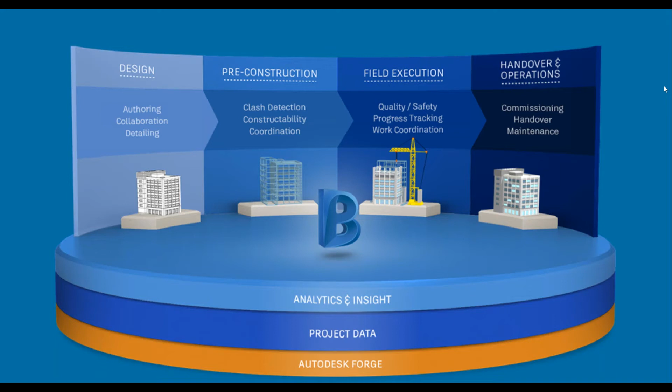So now let's transition over to BIM 360 Docs. Here, this is where everything is going to start and end on our project.

BIM 360 Docs is built on what Autodesk calls a low trust environment. So there's an expectation that we're going to have a number of external stakeholders involved in the project, co-located here within one central area for project information.

What that means is that the entire tool is built on permissions. So we can look at permissions based on individual user, or groups of users based on their company or the role that they play on this project. So when I log in, I'm only getting access to the projects that I've either created or I've been invited to, and I'm only going to see the folder structure that I'm granted access to.

For example, if we are housing our contracts here in this contract folder, and we don't necessarily want anyone outside of our organization to see these, we simply don't grant them access to it, and their folder structure in this case would go from civil to correspondence—they wouldn't even see that that contract folder exists. We can set up this folder hierarchy and all the permissions on a project-by-project basis. We can set up templates. We can really do it however we see fit for our project.

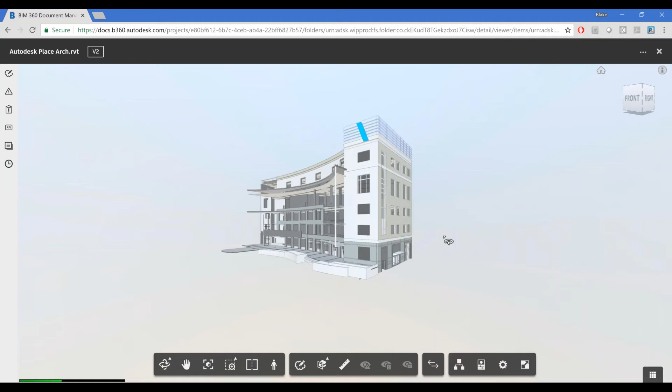Here we can host over 50 file formats that are natively supported for viewing directly within the tool. So if we want to view a Revit model, for example, we can simply select that Revit model and it's going to view it right through our browser without having to have a seat of Revit. This is all rendering live in the cloud. We can now navigate this model, circumvent it, go around it, add sections, and do a number of different views that we'll touch on here shortly.

So we support viewing of those Revit files, DWG, DWF, AutoCAD files, PDFs, all the way out to products like SketchUp files or Microsoft Office files in the form of Word, PowerPoint, Excel. So now a user out on the field has the ability to access that same information that we're seeing in the office environment.

Project files is also the location where our central model is going to reside when we're working inside of a BIM 360 design project. So if we are co-collaborating on a central model, this is where that model will sit, and we'll touch on the folder structure and how we interact with one another in that case.

We also have our plan section then, and you'll notice here that we've got this Autodesk Place Architectural Revit file here, and when we click on it, it was going to take us directly to that 3D model. In the case where we go into our plan section, however, you'll notice that it's the exact same Revit model, and now we are getting all of the various sheet views separated out individually for us. The system does this automatically, so no longer do we have to generate a PDF set every single time the model updates.

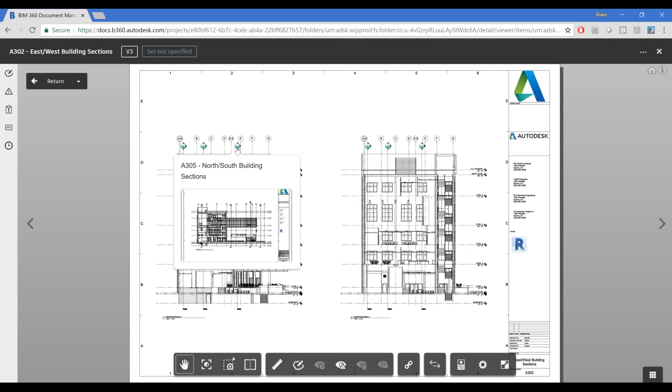I can continue to grab these and navigate further from where I started. I remember when I was in the field, I'd often be trying to understand what was going on in a project, getting the full context, with one sheet between my pinky and ring finger and another between my ring and middle finger, and before you know it I've got this fistful of paper I'm trying to flip back and forth to understand what's going on.

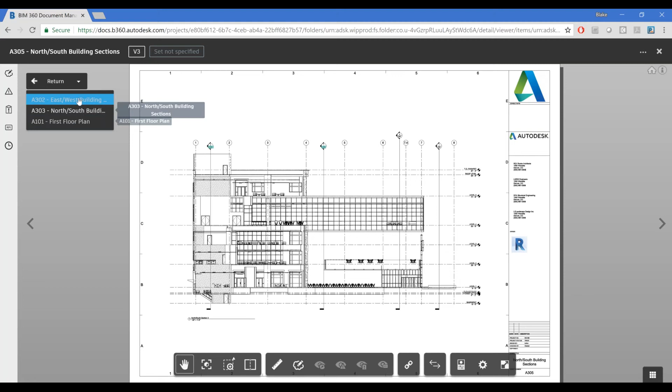Here we have that breadcrumb trail, if you will, where we can easily navigate back to any of those documents we looked at. In this case, I'll select where we started.

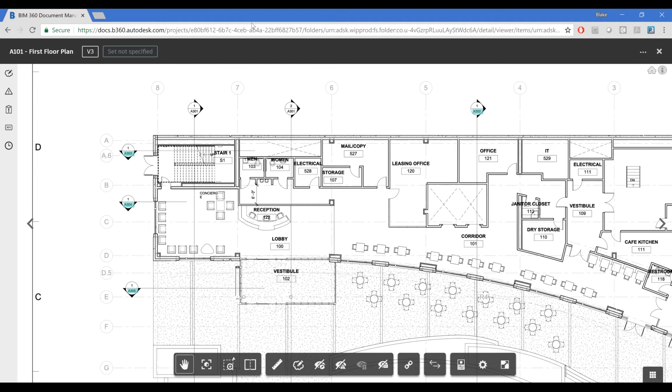The other thing to note is that when we're looking at sheets that don't have section callout hyperlinks, we're not just looking for a shape with some letters and numbers in it, we're actually looking for that content within the project. So if it's not part of our published settings within Revit, we aren't going to create a hyperlink. You'll notice A301 doesn't exist in this folder structure, so it's not going to link to anything. It's also smart enough to know it's not going to link to itself.

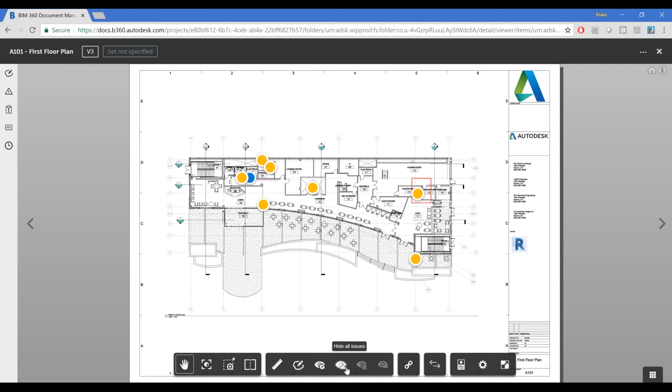The next thing I want to cover is our markups. I'm going to hide our issues here. You'll notice we've got a couple markups on this document, and in our markups pane on the left I can see who created them, when they created them, and what version they created them on. As I select these, it brings that markup front and center in focus for me.

One thing to note is that these markups are created as secondary layers over the top of our documents. What that allows us to do is, as we create new versions, we're not just going to overwrite this markup or get rid of it simply because there's a new version. Maybe that new version doesn't address this markup, so it will flow through to subsequent versions until we actively go in and say it has in fact been taken care of, and we archive it.

When we archive a markup, it's still visible on the document it was created on, as well as any document it was ever active on. We have the ability through our filter to go back and see any archived markups. You'll notice now we've got a number of other ones we didn't initially see.

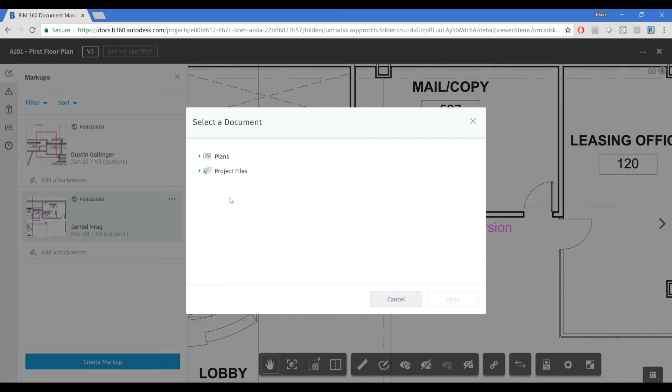We also have the ability to add attachments to our markups, and these can be in the form of documents that reside inside BIM 360 docs, or photos taken right out in the field, with the ability to snap a photo on the spot or select from a group of photos we've already taken.

When creating a markup, the functionality is fairly basic, and that's by design. We imagine a user out in the field on a phone using their finger to create a markup, just looking to convey information from the field back to the office. They could easily create a cloud, add some text, arrows, highlighting, whatever the case may be.

By default, our markups are in a private mode. So if I'm out on the job site or going through my own design review, I leave it private if it only pertains to me. But if I need it viewable by everyone associated with the project who has access to that document, I simply hit publish, and it becomes part of the active set.

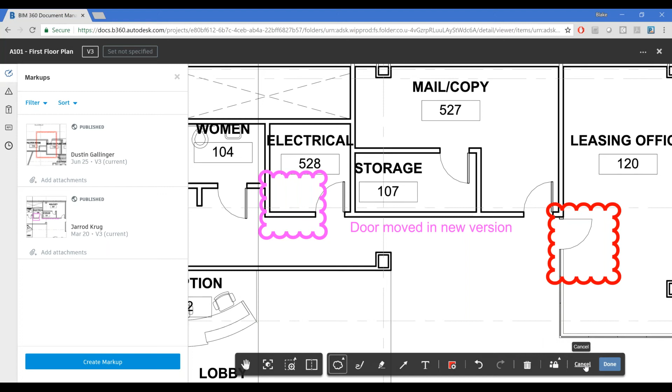We also have the ability to create issues on top of our drawings, and our issues come in the form of these circular push pins. You'll notice we actually put this one right inside this markup. We can see all of our issues over here on the left.

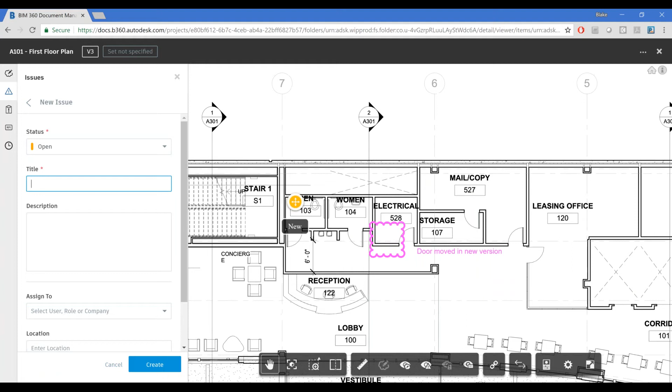When creating an issue, we simply drop where our push pin is going to be located, add a title, a description, a location, and a due date. Say I need it done by Thursday—switch the month since we're going into August—I want it done by Thursday. I can type in a location, but the key piece is our assignment.

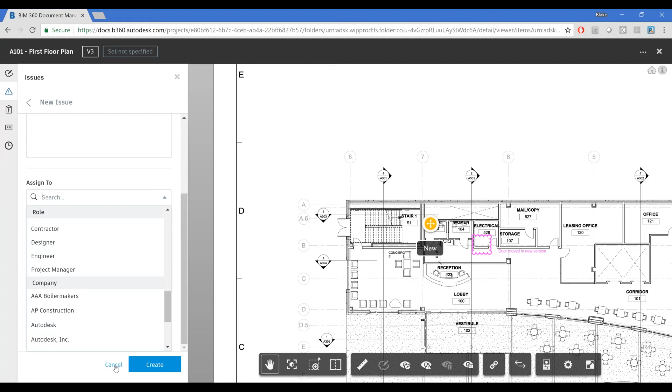We can assign this issue to a specific user, or just like our permissions, to groups of users based on their role or the company they're associated with on this project. When I create this, it sends an email notification to that user or group with all the pertinent information, including a hyperlink. When they click that hyperlink, it navigates them to the view we're in now, bringing that specific issue front and center with all the pertinent details.

Just like our markups, we have the ability to add attachments to issues. We can drag and drop files right from our computer, or browse to them if they sit within our BIM 360 Docs project, as well as have an activity thread where we track everything happening on our issue—if it's reassigned, if the status changes, or if we just want to comment back and forth.

One thing to note about our issues is that only the user assigned an issue has the ability to answer it. I have full administrative privileges in this project, but on a real project, I would only be able to answer this if I am assigned it.

The process would be for the user that created that issue to go in, view the official response, and determine whether or not it has in fact been completed, then go in and close it out. It's more or less a checks and balances process. I can't tell you how many subs I've had on projects who would love to just close out every one of their issues and say, oh yeah, they're off my table, no need to worry about it. Here, only specific users can do and see what they have access to.

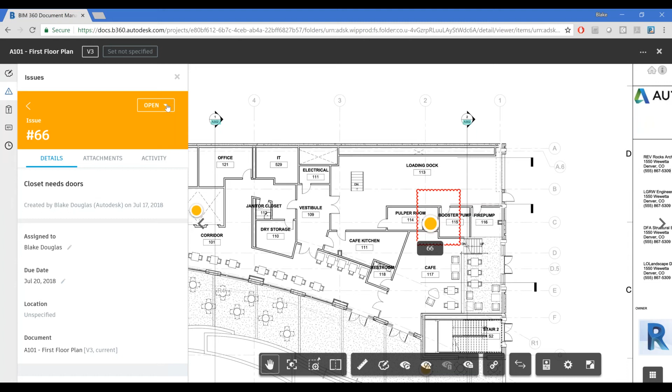The beauty of utilizing the Revit model information when looking at our sheet views is that we can do the same markups and issues on our PDFs, but now with Revit model information, all of this is selectable—all the walls, all the furniture. We can pull the property information off these objects. Going back to moving data from the design phase over to the construction phase, this translates well: we can see this is a chair, this is a particular door, we can see the color, the dimensions. All of this information as it's built out in our model now translates over to the field.

We have the ability to measure. Again, the beauty of utilizing our Revit information is that the scaling is already set, so we can easily see that. If I want to see this in feet and fractional inches, there we go.

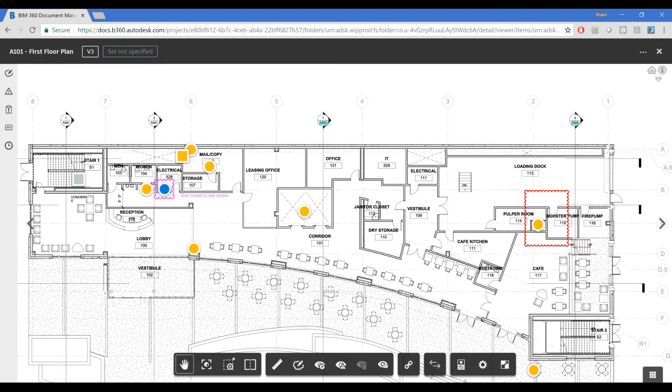We can create those markups and those issues in PDFs as well as directly within our models. If I want to see a markup in my model, I can select that markup and it's going to take me directly to the view that it was created in.

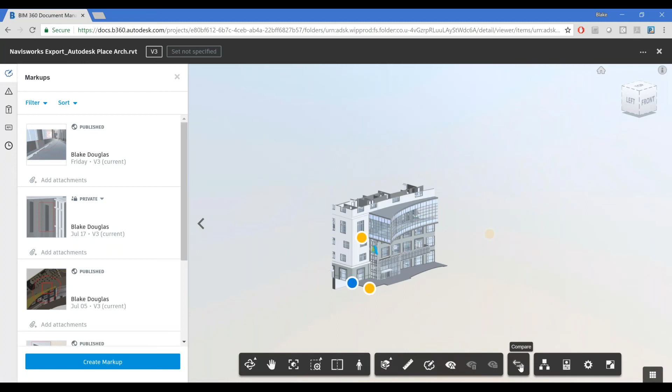I also have the ability to compare our models. So I'm going to compare version 3 of this model and version 2. We can compare any versions that are ever inside BIM 360.

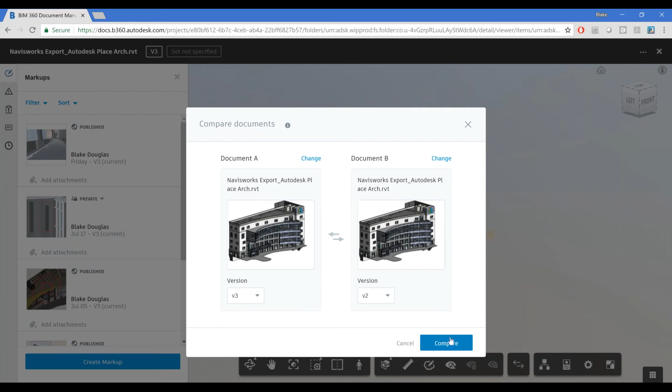For what it's worth, BIM 360 Docs has unlimited data storage. Let me repeat that, we have unlimited data storage. That's unheard of in the industry, unheard of in a cloud platform. Our focus here is on project data. Load in as much information as you can fit into the project, put it in here, and host it here forever. So let's compare between those versions.

When we do this, it's going to create a change report for us. It's going to show us what has been added, what has been removed, and what has been modified between version 2 and version 3. You'll notice that this is a little bit heavier, so we're not quite there yet on the mobile platform. I can further filter this down by discipline or modification type.

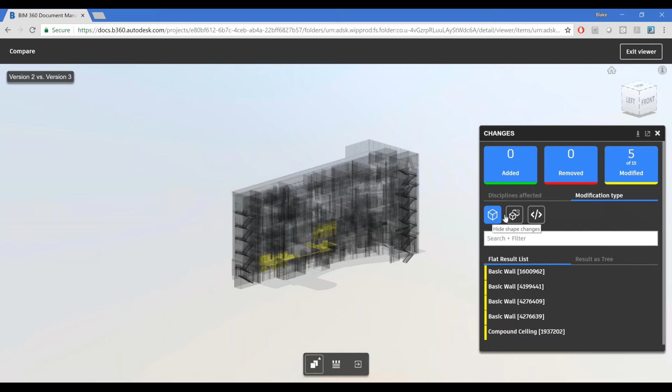So if I turn these off, you'll notice that I'm only looking at shape changes. Now we've got 5 of them. As I select an object, we can see the differences between these versions here, selecting back and forth.

Or when I select from the filter tree here, you'll notice it might be difficult to see the change. It's shortened up a little bit, but by how much? Here it actually gives us that quantity. It's shortened by just over a foot.

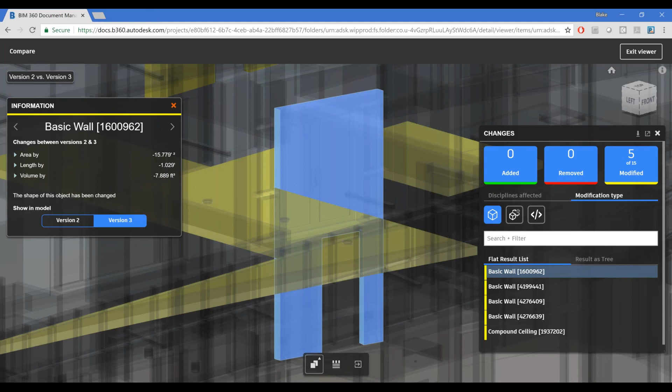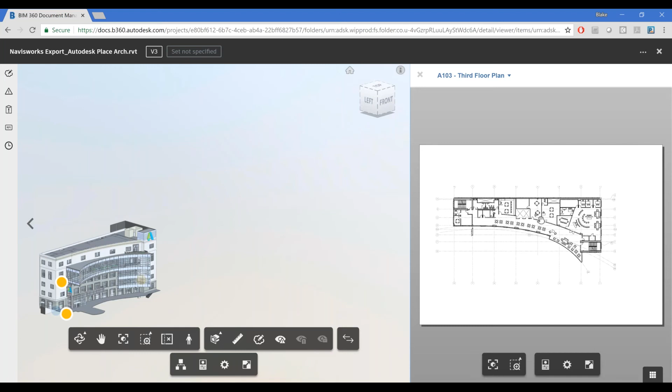We also have the ability to simultaneously view our 3-dimensional document with our 2-dimensional sheet views, and they're tied 1-to-1. So if I go and navigate to a specific sheet, I can then come in and select that same door that I was looking at, and it's going to show that to me in the model.

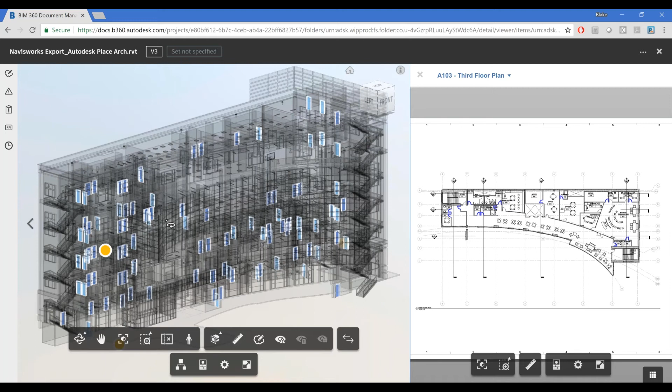Or if I want to look through my model browser and maybe want to identify all of my single flush doors, now it's going to highlight them all for me in the model, and it's going to show me all single flush doors here in blue on our sheet view. Really cool 1-to-1 tie between our contractual documents that we're often used to seeing on project sites with that model. This is kind of that stepping stone into a BIM-enabled workflow.

Now, that's BIM 360 Docs in a nutshell. We do have the ability to look at all of our issues from our document management side. We could filter this down by specific user, the status if need be, apply that. We can export this information to a PDF or a CSV, as well as creating an issue directly from this location.

Now let's touch on BIM 360 Design. So our project is going to start inside of document management because that's where our central model is going to be located. Now what does design mean to our project?

BIM 360 Design is that cloud work sharing that is now more controlled. Through those permissions, we're setting exactly how we're going to interact with those teams. Here I'm inside of Revit. Now we have this collaborate tab opened up, and everything is still managed through our work sets, just like we would if we were working off of a server-based workflow. It almost functions no differently.

The idea here is that we're pushing to the cloud and pulling down changes from the cloud, all based on a cache version. So we're only moving those changes. We're not having to upload and download the entire model every single time.

We also have the ability here to determine exactly what is going to be published in that plan section inside of document management. So we determine which sets are active, it can be 3D views, it can be sheets. If I turn this one off, for example, and I save and close, now when I publish this model to the docs environment inside of plans, we will only see set 2 and set 3. So all of those sheets associated with set 2 and the ground floor sets associated with set 3, we won't have those 3D views there.

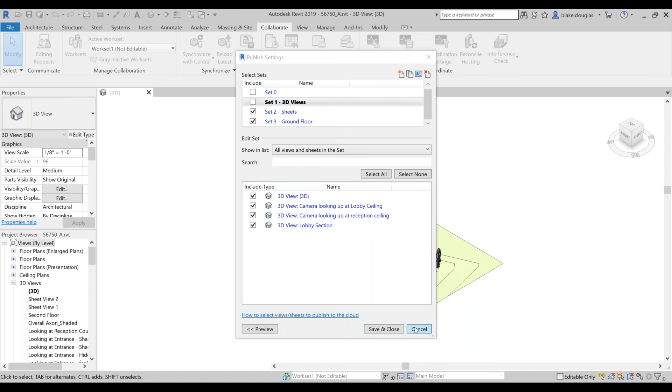Within BIM 360, we have a folder structure that's set up for our various project teams. In this case, we've got the architectural team, the civil team, the mechanical team, and the structural team. All of them are going to have their own folder.

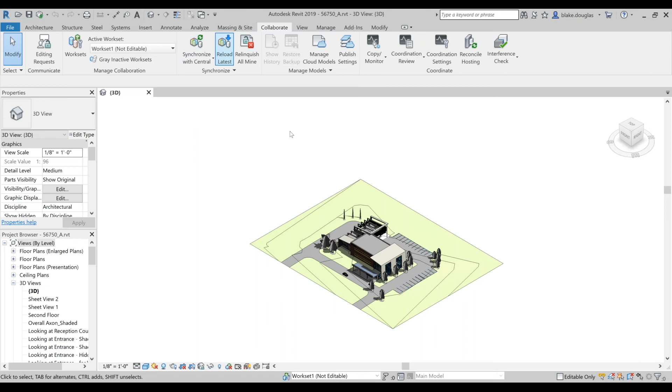So if I'm a part of the architectural team, this is where my central model is going to sit. If I'm a part of one of those other teams and the permissions are set up accordingly, I can link directly to this model so that every time the architectural team is in Revit and they synchronize with Central, we're going to see an updated version through our link immediately.

The second way that we have to link to these documents is through this shared folder. So if I'm a part of the architectural team and I don't want them linking every single time we hit synchronize, I want to be in charge of when we're actively going to share this out with those other teams. I simply don't grant them access to my architectural folder, but then they'll have access to this shared architectural folder. In this case, this model will sit here, and they can link to that. So every time we actively go in and say we definitively want to share at this point, at this point, down the project timescale, we can do that.

And then the last way that we can interact is through a consumption model. So if I'm a part of the structural team, for example, and the architectural team has shared that model with me, I don't necessarily want to link to that model every single time they share. I want to go in, actively review what that new share encompasses, what some of those changes are, and determine exactly when I want to link to that shared model.

In that case, that's called a consumption, or consumed. Here, we can review that shared file and we can determine we want to consume it. We've got that architectural consumed folder, and here's where that model sits. All of that is managed through our design collaboration module.

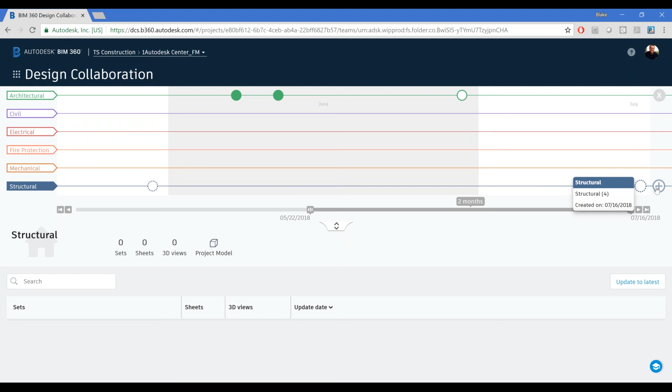Creating a package is very simple from this location. We can create it, and we can select all of the different pieces of information that we want from our project. So we could have just the model, or we could have specific sets, sheets, and 3D views. Go ahead and delete that one because we didn't put anything in it.

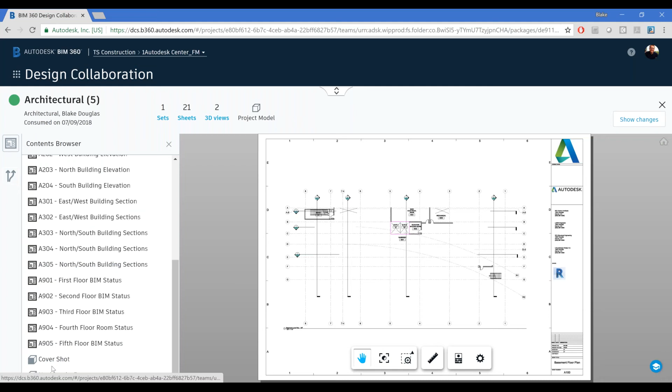In the case of looking at consumed information, we can see exactly what is inside that package by exploring it. We can see that we've got a 75% CD set here. We can go into specific 3D views, into specific sheets. We can see all of those different views. So in the case where we want to look at one of those 3D views, we can see that.

We also have the ability to visualize those changes. It's going to be that same change report that we saw inside of BIM 360 Docs. In this case, there are no changes to the model. Again, if I wanted to, I can come into that architectural package that was shared out to me. If I choose to consume this, it'll automatically put it in that consumed folder under that team for me. So again, just gives us a little bit more flexibility in terms of how we want to operate with those various project teams.

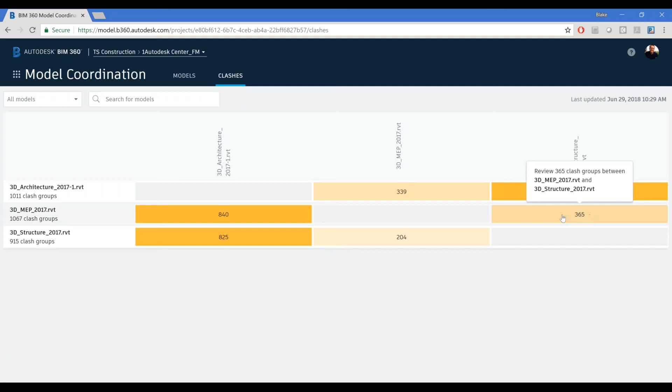Moving along then to BIM 360 Glue. BIM 360 Glue is going to run our clash detection for us against our various models as they sit inside of BIM 360 Docs. So through model coordination, we can determine exactly which models we want to sit in here. And through our clash report, it's going to automatically run this every single time that model is updated. Here we can see if we want to look at our MEP against our structural model, we've got 365 clashes. All of these clashes are automatically grouped for us.

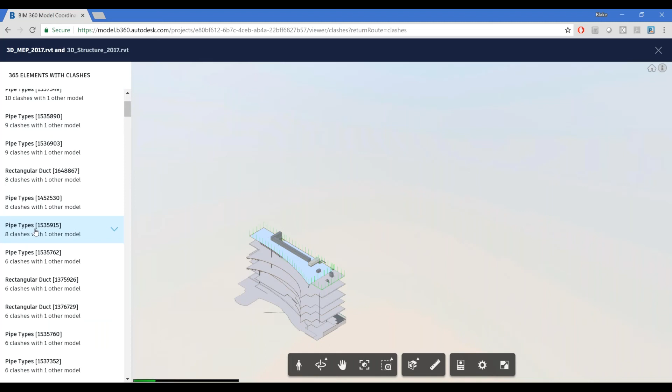This is going to load our clashes in and load both of those models simultaneously. We can then select our clashes and see exactly what is happening. So if I want to see a pipe, for example, we can identify those clashes over here in the model. Or if I wanted to see a rectangular duct, we can see that it's going through some of those structural floors and our cutouts aren't in perfect alignment.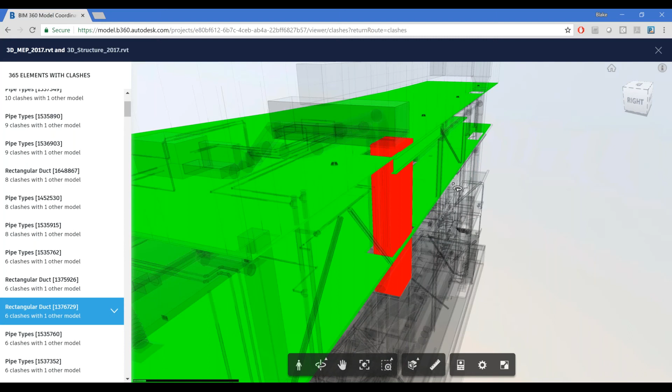Moving on then, for the sake of time, let's touch on some of the other modules. BIM 360 Build encompasses both project management and field management.

We do have the ability to add co-reviewers, so they might be users involved in the process, adding additional attachments or being involved in the activity, commenting back and forth. But it's still up to Neil, in this case, to progress this RFI along in terms of its status.

We also have a distribution list that we don't have with our issues, where it may be an RFI that affects a broader scope. But in this RFI, Frank isn't going to be able to contribute - he's not going to add attachments or activity. He's just going to be aware of this RFI happening in the background.